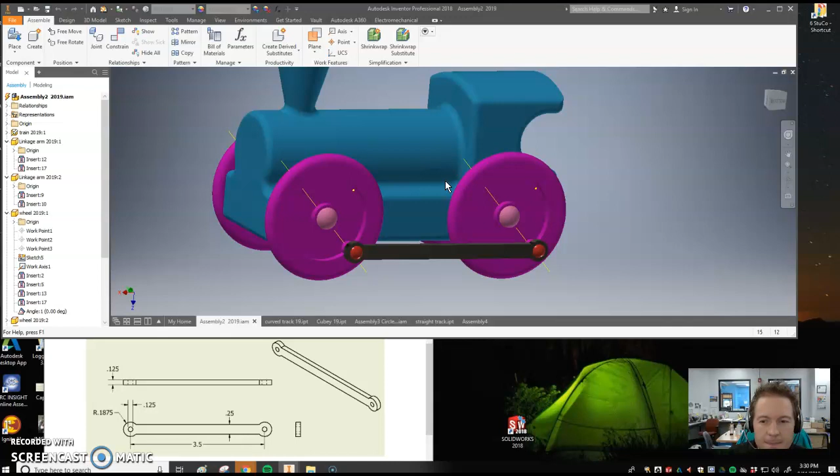So let's go over here, we're going to go File New, or you could hit Control N, either way. We're going to open a new part file, and make this slightly bigger so you guys can see it. So this is what I'm trying to build right down here. To start off with, like always, we start with the sketch.

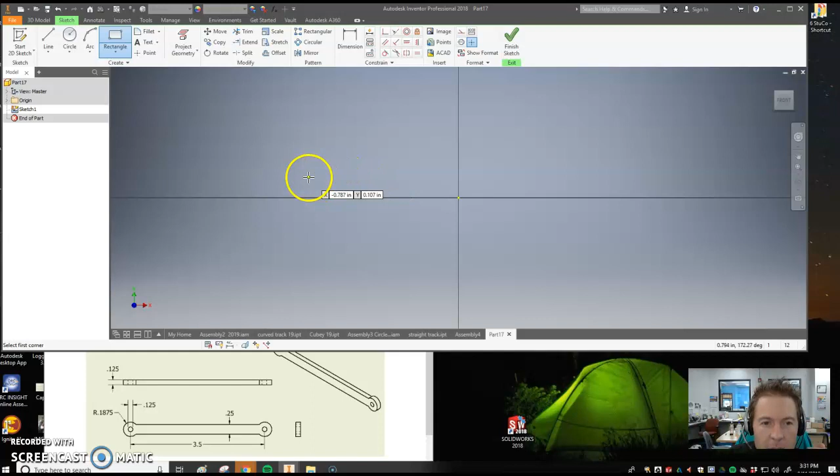So I click Sketch. Now we're just going to throw this rectangle down. I'm going to try and build this core of the body first, so I'm going to throw down any rectangle. Now it's real important we don't accidentally get it locked in here. Other things happen when you lock it in. Sometimes it's trying to be helpful, but it's not always helpful. So I'm just going to throw down this rectangle.

From there, now we see for these two arcs down here, we want to throw in these partial arcs. So I'm going to use our arc tool. It's a 3-point arc by default, but you can get other options up here. With the 3-point arc tool, I'll click one corner, the other corner, and make this a bit bigger than that distance. I'm going to do the same thing over here. We'll dimension those in a second so it doesn't actually matter what I'm doing right now. Okay, so there's a good start.

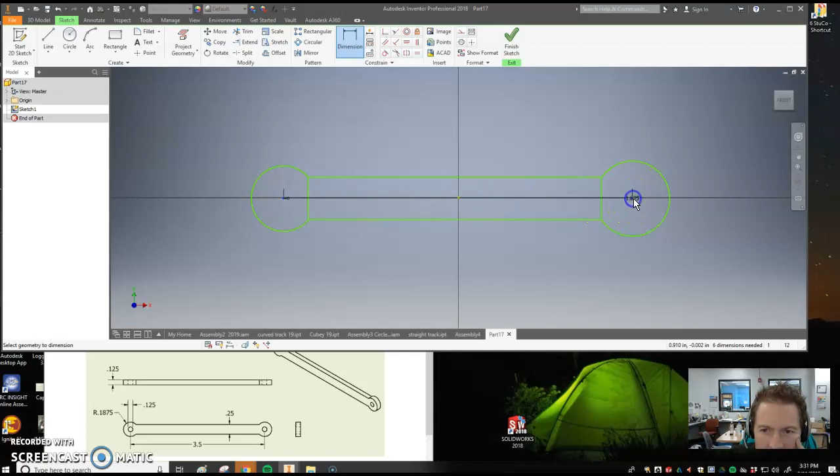Next I'm going to throw in some dimensions. Let's get these going. Dimension, I want this distance to that distance right there. It looks like I need that to be 3.5, so I'm going to set that to 3.5. I just clicked on it and there we go, made it a little bit bigger. I'm going to go ahead and zoom out.

Next, as I look down here, I see that the radius on our big circle here needs to be 0.1875. That's also 3/16, you can type it in either way. I'll type in 0.1875, and I'm going to do the same thing over here. Actually, this time I'm just going to type in 3/16 so we can confirm those are the same thing.

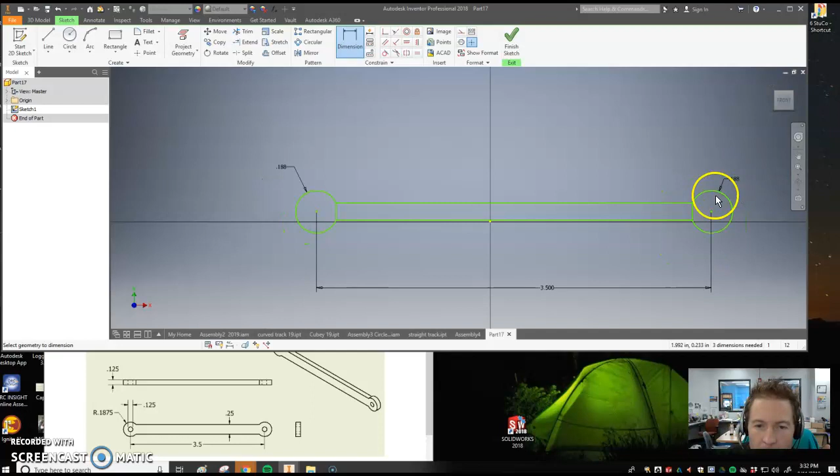Great, okay. Next, as I look down here, I see that this distance here needs to be 0.25, so I'm going to set that to 0.25. Great, okay, that's looking pretty much how I want it so far. To get these other features, we'll extrude it and then use the hole function, but for now that sketch looks to be what I need it to be.

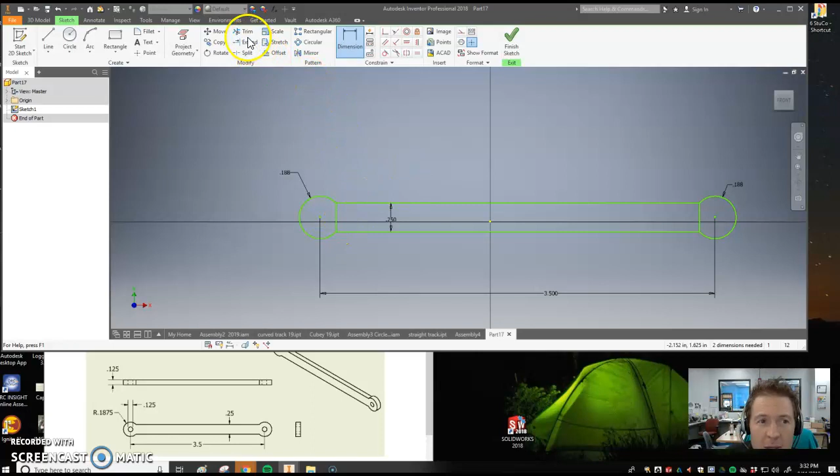You can trim these out, you don't have to, but to practice it for you guys to see it, I will do it for now. Trim: I'm going to trim that part out and that part out. Okay, now we have our sketch.

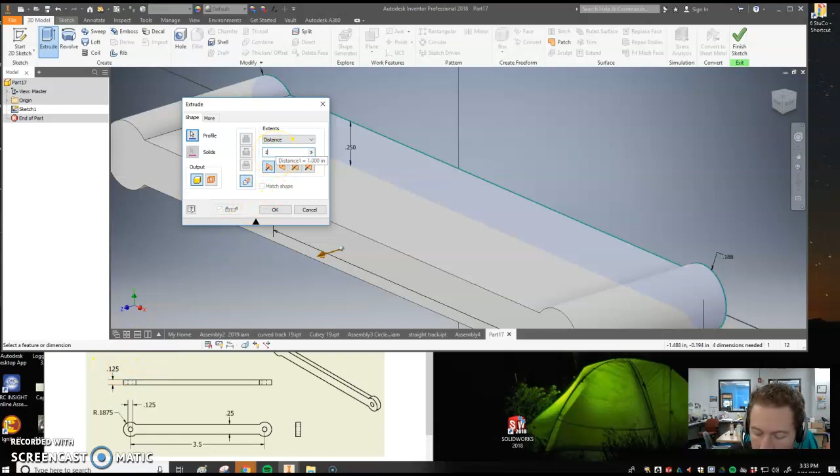Now to give it dimension or thickness, that's what extruding is for. So I'm going to go up, extrude. Now the question is how far do we want that to be? Over here in my drawing file, I see that needs to be 0.125, or 1/8 of an inch, so I'm going to type in 1/8. And okay, that looks great. So there's the start of it.

Now we need to get these two holes in here such that we can actually put the pegs through, as we saw in the train part. So to put these holes in here, I'm going to go back to Sketch. Now I need to get a hole right there and there.

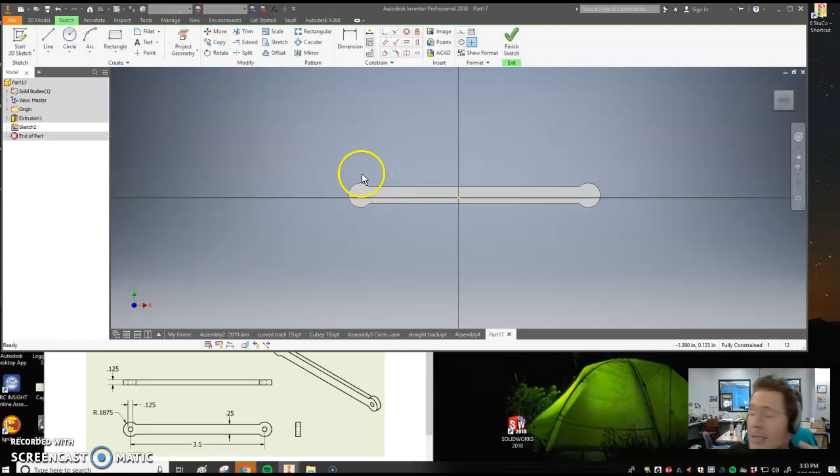To do this—really important, big step here—we want it to show us where the center is. So to get that center, I'm going to use this project geometry, click here, and notice it points out the center. So now I can take the point tool and get a point right there. I also want it to tell me the center down here, so I went up to project geometry, clicked the circle, it shows me the exact center, grab my point tool, and put a point right there.

And just to be certain, I'm going to measure how far apart these are. As I see in the drawing file, we need these to be 3.5. Awesome, that's right. This is really important — without that, the later train assembly won't work correctly.

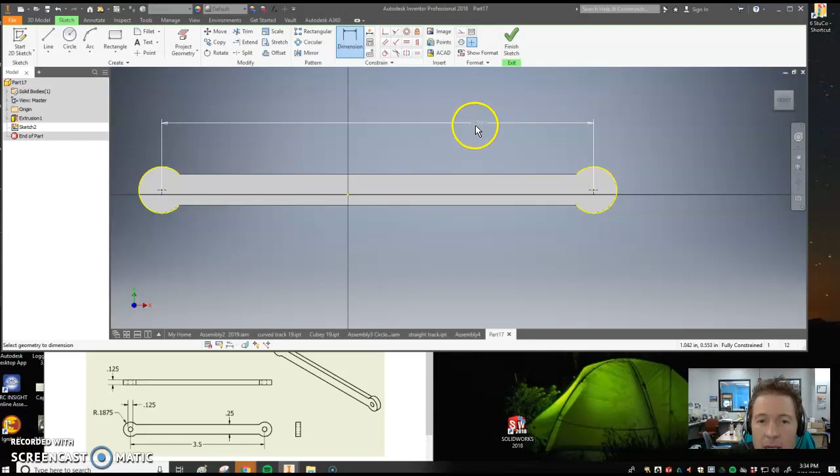Okay, from here, now we can actually make these holes. So I'm going to go up to the 3D model, we're going to go to the holes. I'll move this so you can see that. So it defaulted — it knew kind of that's where I wanted, that was our most recent sketch. Now those holes are too big.

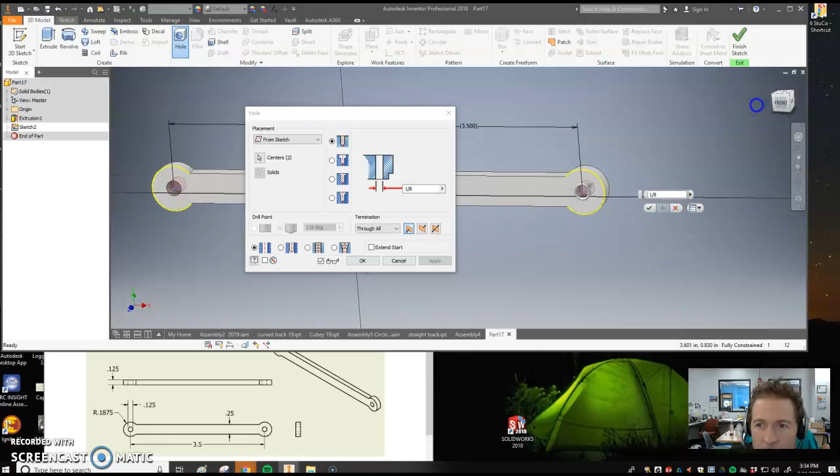We want those holes to be 1/8 of an inch, so either here you can type in 0.125 or you can put 1/8. We do want it to go all the way through. I'm going to adjust the view cube here in a second, make sure that's looking right. So here I'm just dragging the corner. That looks great, hit OK.

Last step, change your color, make it whatever color you're interested in. And that is your linkage pin.